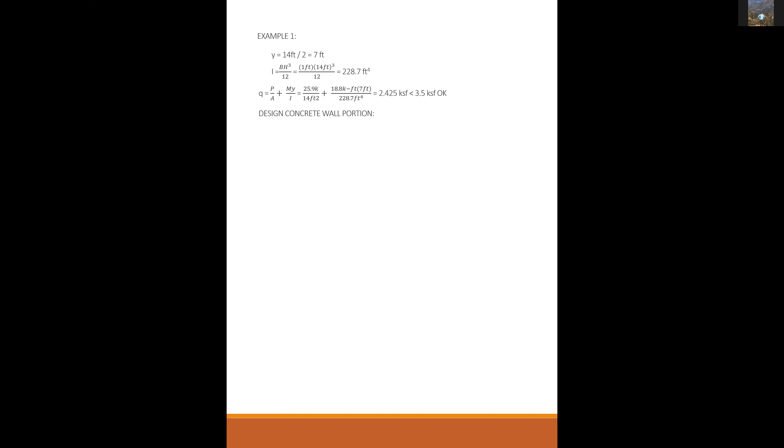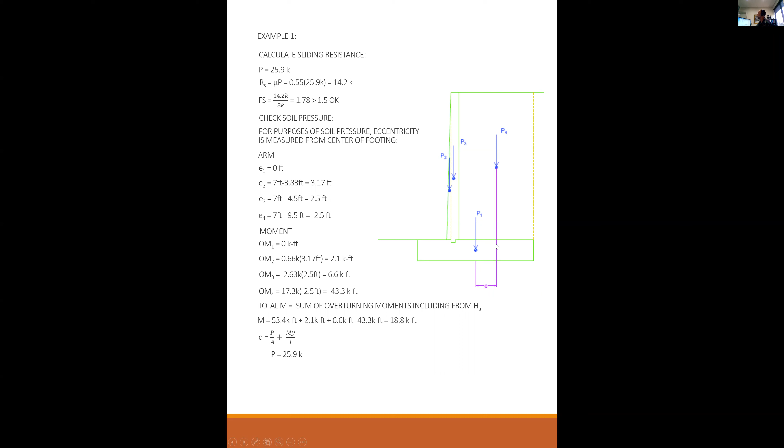All right. So where we left off last time, let me back up a few here. Okay, so this is, I guess, far enough. So what we were doing last time was designing this retaining wall system. And what we had determined is that this retaining wall with a factor of safety of 1.5, this wall will not slide, it will not overturn. And the last thing that we checked was that the allowable bearing pressure is actually greater than the actual bearing pressure. On this check here, you notice there is no 1.5 safety factor on this one. The factor of safety is built into this allowable number that we get from the geotech.

There we go. Okay, so the 3.5 KSF number that we get from the geotech, that already has factors of safety built into that number. So we don't need to clear that number by a factor of 1.5, we just need to be under that number. But for overturning moment, you have to have a factor of safety of 1.5, and for sliding, you have to have a factor of safety of 1.5.

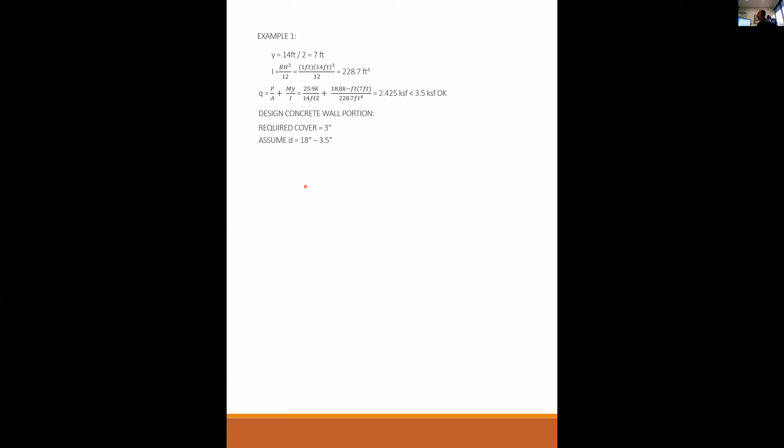Okay, so then where we left off is in the concrete design portion. So now we're going to design the concrete wall. And because the soil is bearing directly against that wall, then we have to have 3 inches of cover minimum. So the wall was 18 inches thick at the base. The wall is only 12 inches thick at the top of the wall. But at the base is where you have your maximum moment. So we're going to look at the flexural capacity of the wall at the base of the wall with a D assumed to be 18 minus 3.5, which is a 14.5 inch D.

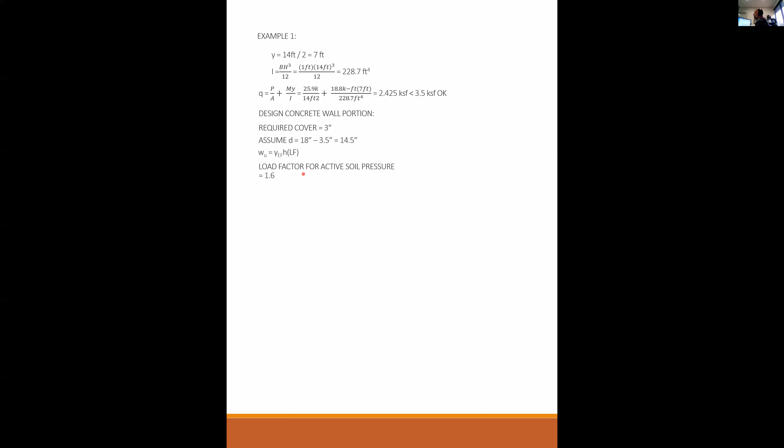The linear load is assumed to be the equivalent fluid pressure times the height times a load factor. So the load factor, according to ASCE 7 for soil pressure, is 1.6. So this is what we're doing. We're calculating what this linear load is, and it's the equivalent fluid pressure, like I mentioned, times the height of where it is we're checking, times a load factor. Why do I have a load factor? Because now I'm designing concrete. When you design concrete, everything is in load factor or ultimate capacity. So I have to put a load factor on it now.

So flexure is looked at right at the base of the wall. So I have my equivalent fluid pressure of 40 pounds per cubic foot times a height of 17.5. The width of the wall I'm considering is 1 foot, load factor 1.6. That gives me 1.12 kips per lineal foot at the base of the wall. For shear, I check my shear at D up from the base of the wall. Just like the footings, just like beams, you go up D from the base. So that gives me a slightly less value by 17.5 feet minus 14.5 inches over 12, which is 1.043 kips per lineal foot.

So the flexural moment is the 1.12 times 17.5 over 2 times a moment arm of a third of the triangle. So that's 17.5 over 3, 57.2 kip feet. I go with my 57.2 kip feet. I use what should be very familiar now, my reinforcing index equation, Mu over phi b d squared. Mu 57.5 times 12 over phi times the width of 12 times a D of 14.5 squared gives me 304 PSI. And then I can look that up in my table, and 304 PSI gives me a rho of 0.0054.

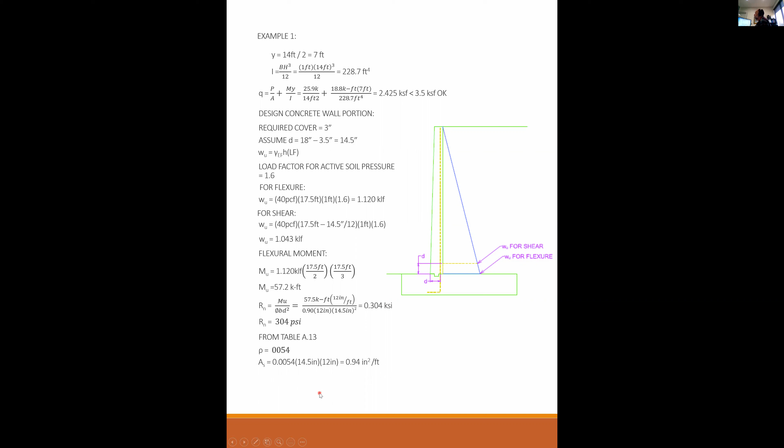0.0054 times 14.5 times 12 gives me a required steel of 0.94 inches squared per foot. If I use number 7 bars, the area of a number 7 bar is 0.60. So my spacing requirement is my steel per bar divided by my total required steel times 12. So 0.6 over 0.94 times 12 gives me a maximum spacing of 7.66 inches. So I'm going to use number 7s at 7 inches on center.

My provided steel then is the opposite of this equation. I put in my per bar area times 12 over my spacing, and I'm providing 1.03 inches squared per foot of steel. Rho then is 1.03 over 12 times 14.5 is 0.0059. 0.0059 is between my minimum 0.0033 and my maximum 0.0181. Where did I get these values?

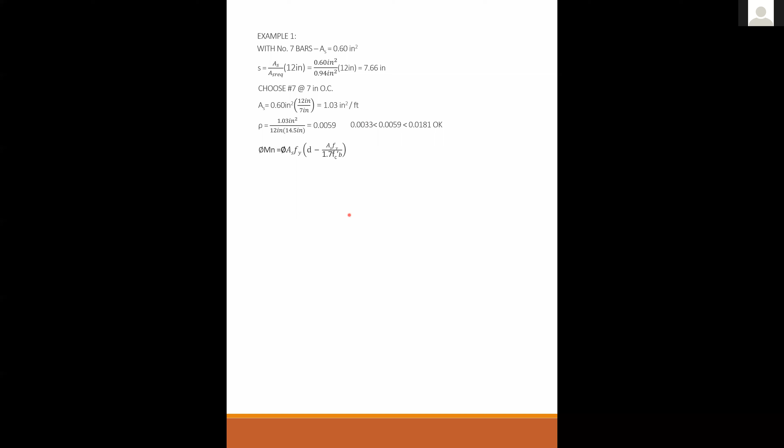That's the minimum side. On the maximum side, 0.0059 less than 0.0181 means that if you calculate epsilon sub t, which is equal to 0.003 times d minus c over c, then you will get a number that is bigger than 0.005. Okay. And then the third check that always must be done is phi Mn is greater than Mu. This is a singly reinforced rectangular beam, so we are allowed to use this equation.

So if I plug in my 1.03, 60 KSI, d, 1.03, 60 KSI over 1.7 times 4 times a width of 12, I get 764.4 kip inch or 63.7 kip feet. 63.7 kip feet is greater than 57.2, so therefore I've got an acceptable design. I cannot stress this enough, that once you choose your steel, you're not done. You're not even close to being done.

Everything that you did before this was just to help guide you to a practical solution. But just because I say use number sevens at 7 doesn't mean anything until I've confirmed that the steel I'm providing falls within the range of minimum and maximum, and that the steel I am providing actually gives me more strength than is required. Only then am I done, and I can move on from my choice of number sevens at 7.

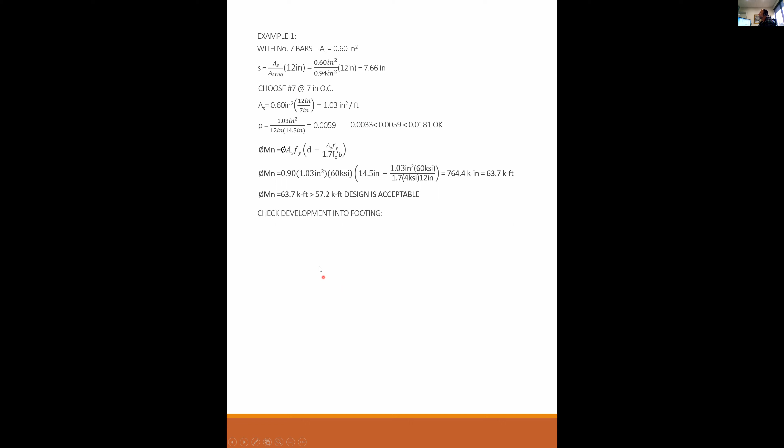And we can say the design is acceptable. Okay, now we need to check our development into the footing. This is the base of the wall. This is where that overturning moment is happening right here in the concrete. If this concrete wants to bend out and it's stressing this rebar, what keeps that rebar from just yanking out of the footing? Well, you have to have enough development into the footing.

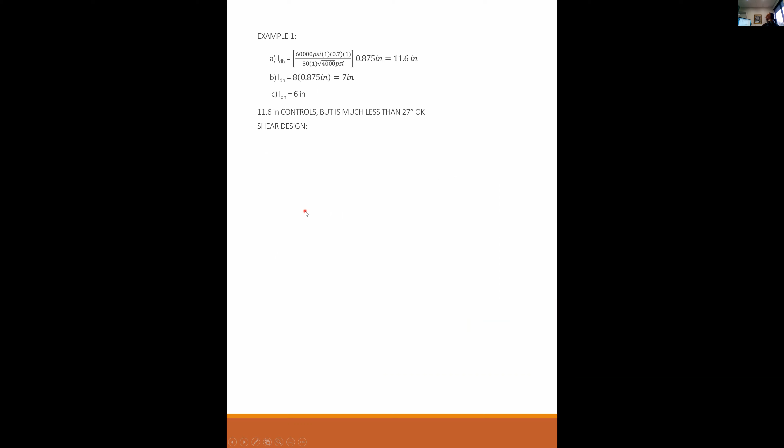Okay, so the shear design. We're still looking at the wall, but we need to make sure that the wall has adequate shear design along with adequate flexural design. So the maximum load for shear design we found to be 1.043 kips per lineal foot. The shear demand is 1.043 times the height of the wall above that d point. Shear is always looked at d above the bottom of the wall. So it's not the full 17.5 feet that we use for flexure. It's 17.5 feet minus d, gets you to 16.29 feet. So the shear demand is 8.5 kips.

Our capacity is 2 lambda square root f'c bw d. So this is hard rock concrete. So 2 times 1 square root 4,000. Width of 12, d is 14.5. I get a capacity of 22 kips. That's my nominal capacity. My allowable capacity, phi Vc, is 16.5 kips, which is greater than 8.5 kips. So we're okay. Retaining walls, like footings, don't use shear ties.

It'd be very, very impractical. In fact, let me go back to the diagram. It's not impossible, but just impractical that you're going to go in here and put a whole bunch of ties in this direction.

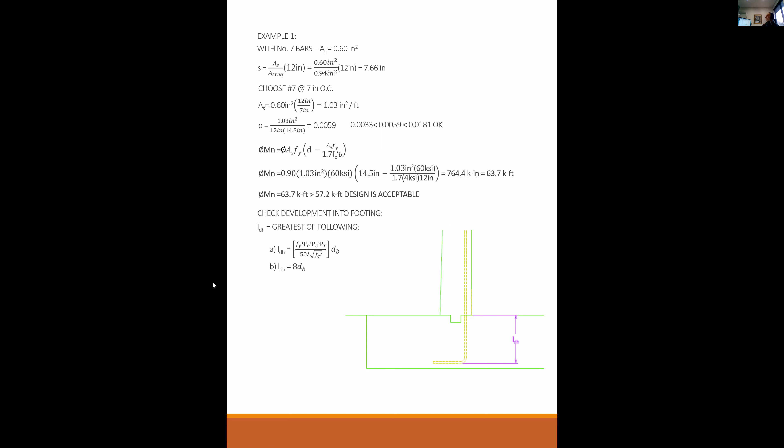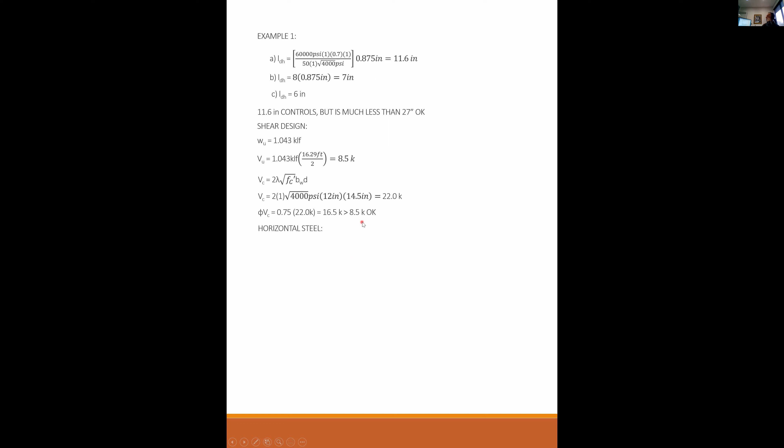Again, you could do it, it's just not seen because it's somewhat impractical. If your shear demand didn't work, then usually what you do is just make the wall thicker, not add steel in that direction. Okay, so we get down here. Shear capacity is greater than my demand. We're okay there. Now we look at horizontal steel.

Horizontal steel is controlled by ACI 318, section 11.6.1, table 11.6.1. So for bars greater than a number 5, they are looking for a rho factor of 0.0025. So the area of steel required, 0.0025 times b times d, is 0.435 inches squared. So with the number 6 bar, my provided area of steel is 0.44.

So if I do my equation where I put my bar over my required, I got 0.44 over 0.435, which is just over 12 inches. So I can use number 6s at 12 inches on center for that wall steel. And so the number 7s at 7 are vertical bars. They're for the bending of the wall, so the wall has sufficient out-of-plane bending, and they're placed towards the back to give you the most leverage against that bending action.

The number 6s at 12 are horizontal bars. I know in this image you really can't see them, but there's little dots. Let me draw one of them, just to clarify. They're on here, but they're really small. So they're dots that look like this, and that represents horizontal bars. So they're running in and out of the page horizontally, forming basically a grid with the vertical bars.

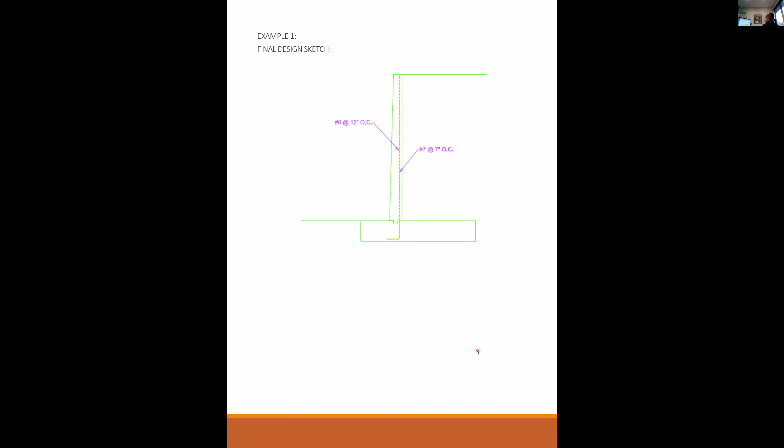The design of the footing at the toe as well as at the heel follows the design process for footings as described in lecture 15. That was our last lecture. And that is it. Anybody have any questions for retaining walls?

So that number 7 bar is whatever the length of the wall, it goes into the page, right? Let me bring it back up. Okay, so the number 7, oh, I mean number 6. Okay, yeah. Number 6 is the length of the wall. Yes. If that wall is 40 feet long, you can use 40-foot long pieces of number 6 bar. If that wall is 200 feet long, then you would splice them.

So you'd probably bring in 40 or 60-foot pieces of number 6 bar, and you would splice them at the ends, overlap them per our lecture when we talked about rebar development and lap splicing. You would just lap splice them. You could, I suppose, mechanically splice them, or you could weld them as a splice, but nobody would do that when it's far, far cheaper to just overlap them by a foot or two and develop them.

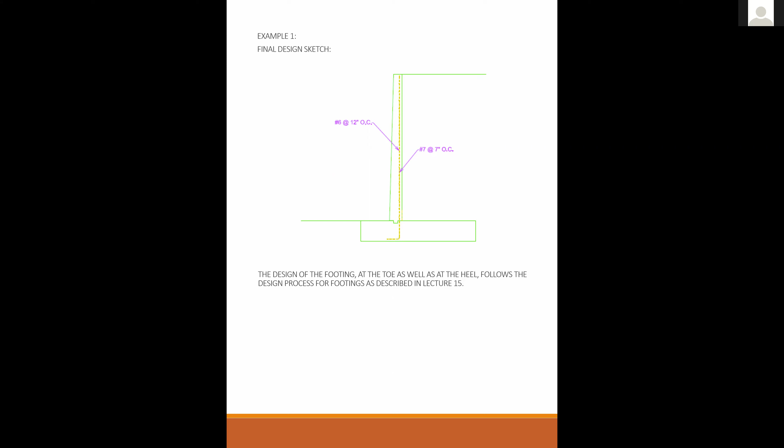Okay, and then just for clarification, the soil is on the right side, and yeah, it makes sense. If it's on the left side, your rebar will be on the left side as well. Correct. Okay. But just because you mentioned it, I'll bring up the original.

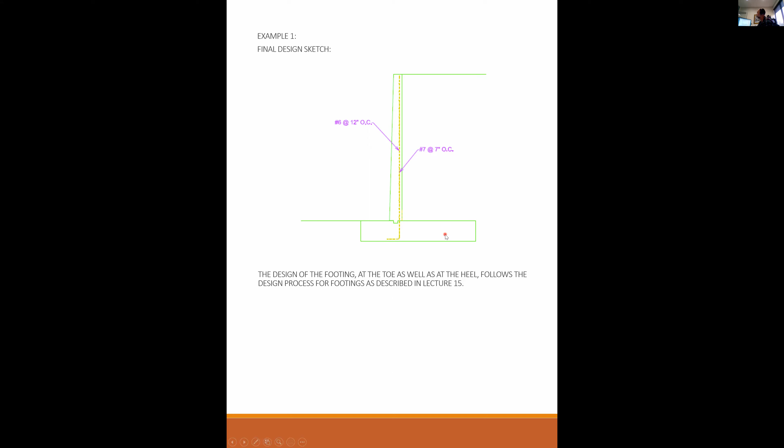Going through a few hundred slides here. There we are. Why does that not want to work? Okay, we'll do it this way. Now that takes forever. That is so bizarre.

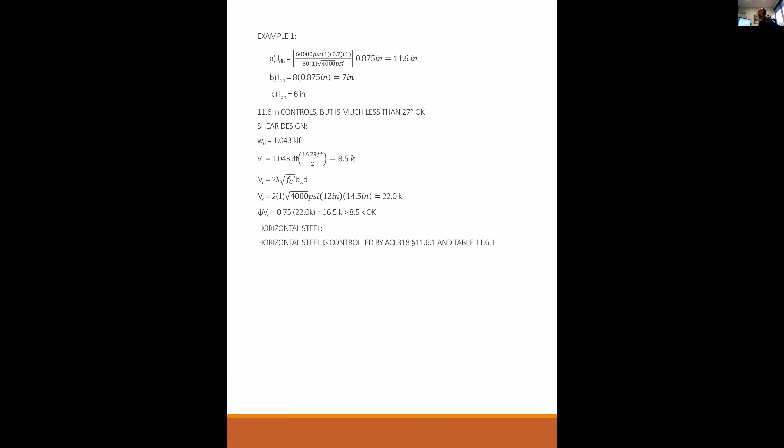Any other questions for me on retaining walls? Okay, well, what do we have? Like an hour and 20 minutes? Who's got questions you'd like to ask? This is your last chance before the final at 8:10 on Tuesday. The exam is cumulative, correct? Yes, sir. Okay.